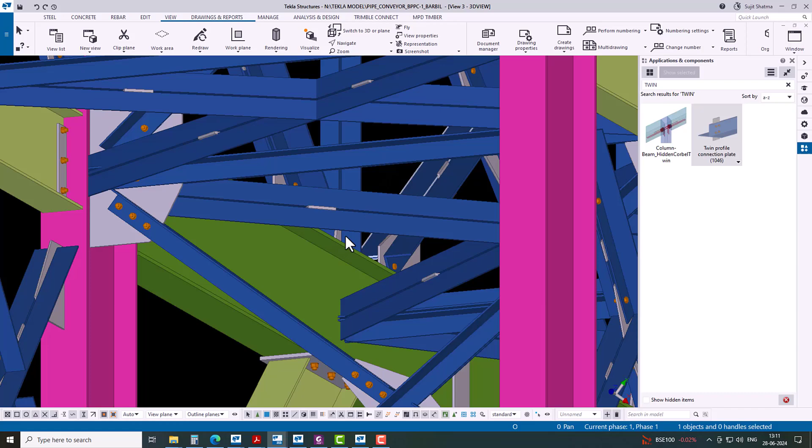Friends, today I come with another exciting video about how we can easily create a twin profile connection in Tekla structure. So let's move in.

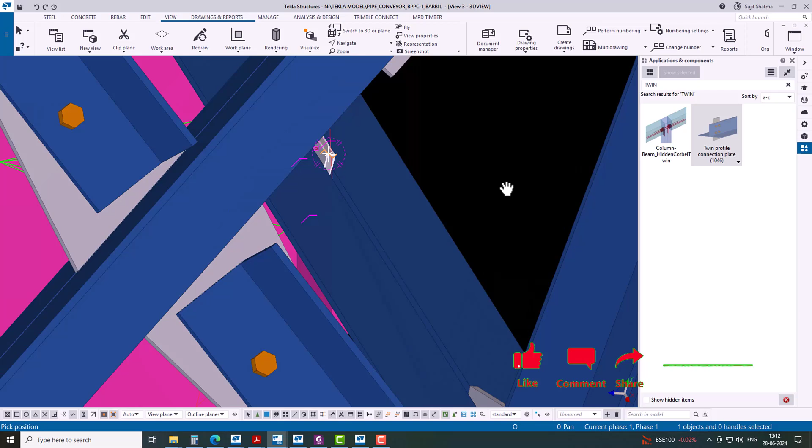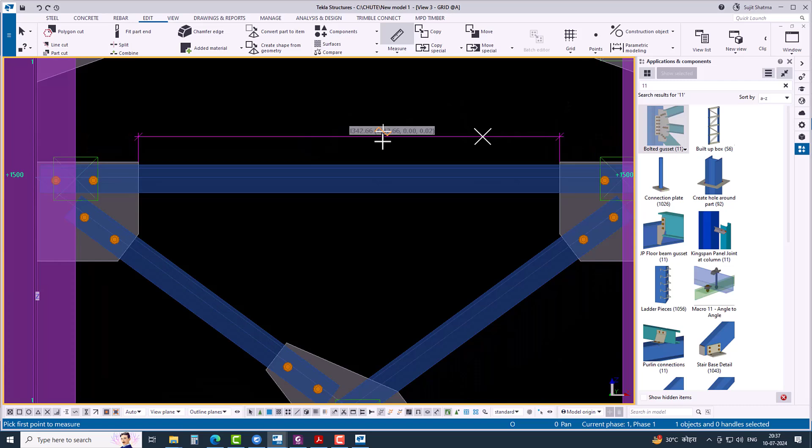As you can see, there is one small structure. For this tutorial we already made in this Tekla software, and now we are going to create a twin profile connection between this vertical bracing. Generally twin profile connections are used to connect two different angles with a certain plate, and this angle we can also use for two different members which have some close distance.

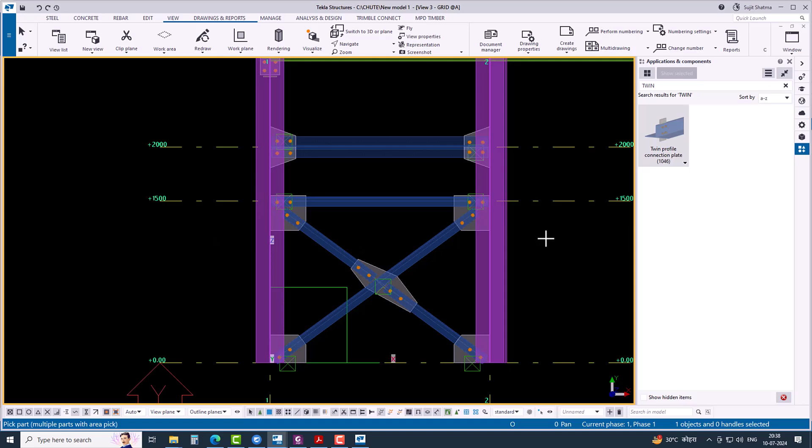In order to use this 1046 twin profile connection, we need some reference points. So first we need to create some reference points to place the twin profile plate. As you can see here, we already created a small vertical bracing connection for this tutorial, and the distance between these two connection plates is near about 1300 millimeter and 700 millimeter.

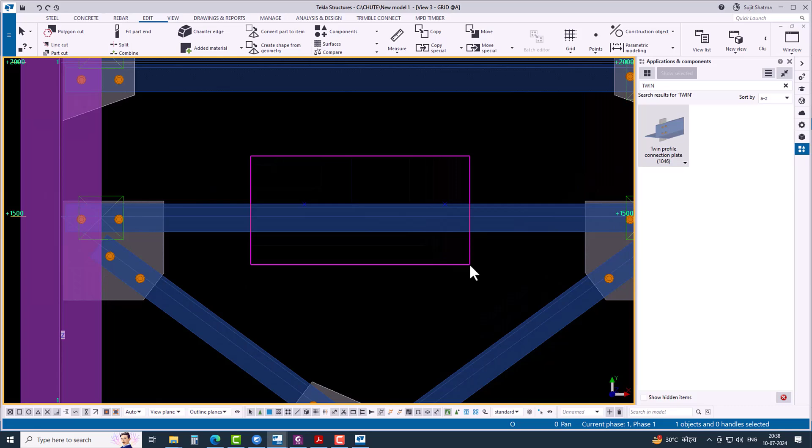So placement of the twin profile also depends upon the design drawing and the distance between the gusset connection. So first of all we need to create some reference points over this twin structure.

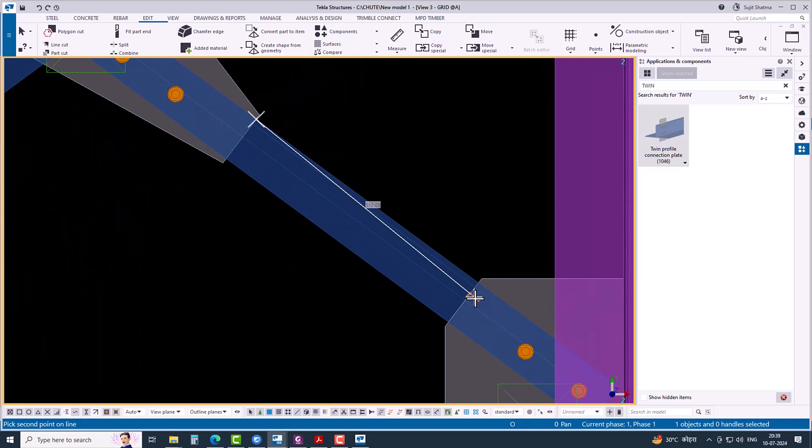For that you need to go to the edit section and take the point. Here we are using by default 1 or 2 points. You can see here, now again go to the point, divide the line points, and create one or two different points at a certain distance.

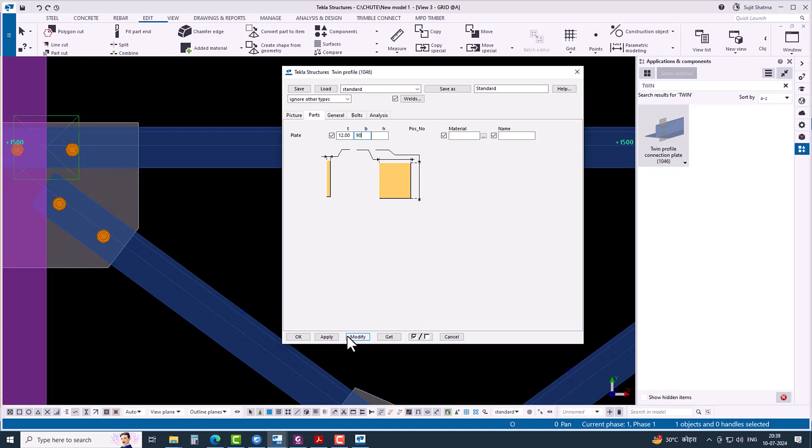So first we need to create a number of points in the twin angle. Then go to the connection and set the UCS as the current UCS. Here we are using by default 12 millimeter back to back distance between the member.

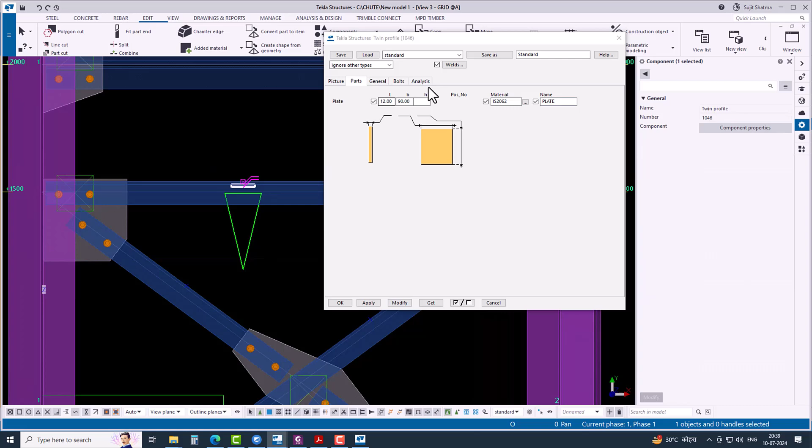So the thickness of this gusset plate should be equal to 12 millimeter, and we are using ISA 90. So the width of this plate, by default, we are using 90 millimeter, and the material and name of the plate you can define as required.

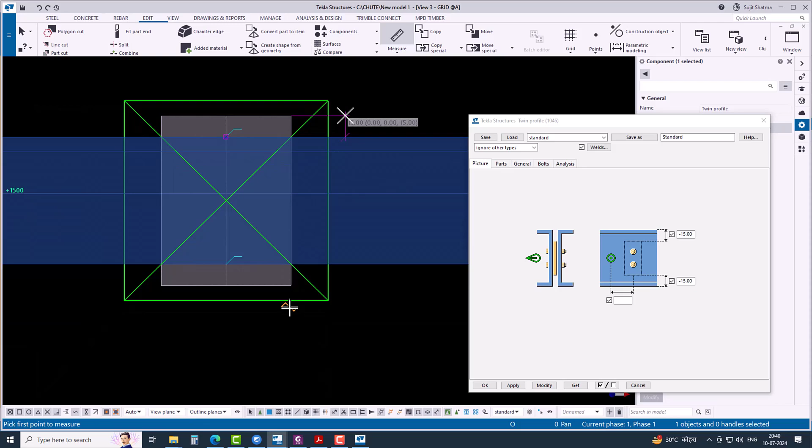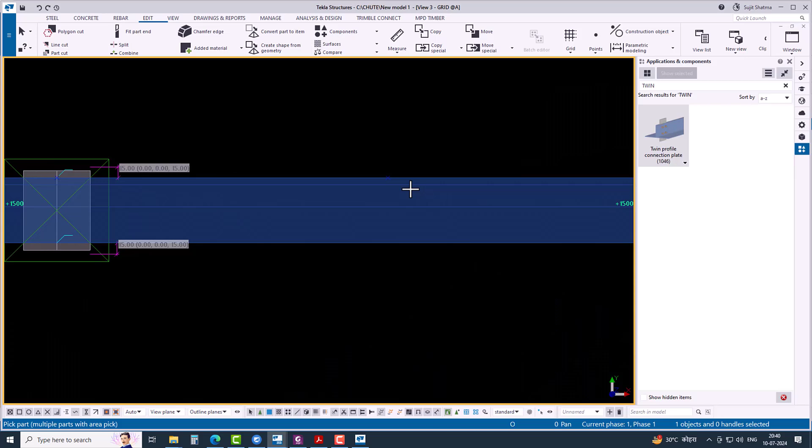You can see here the height of this plate is by default equal to the height of the member. Simply just put here minus 15 or minus 10 millimeter to extend this plate. Generally we give the extension only for the back to back angle.

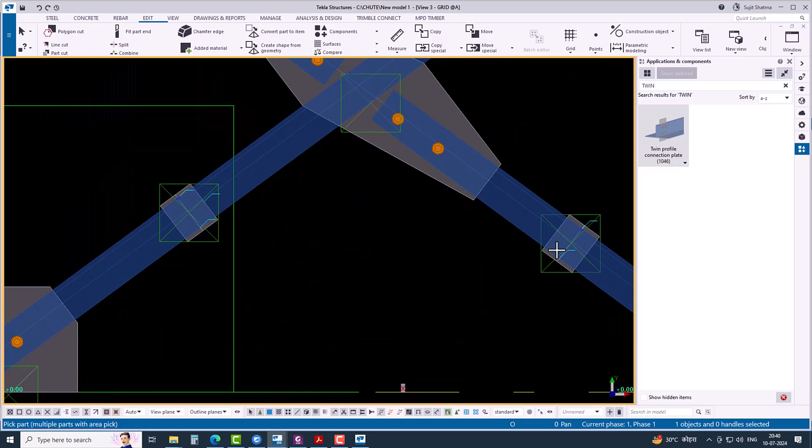Now again select this member and pick the member first, then pick the reference point, and similarly you can also put this connection here.

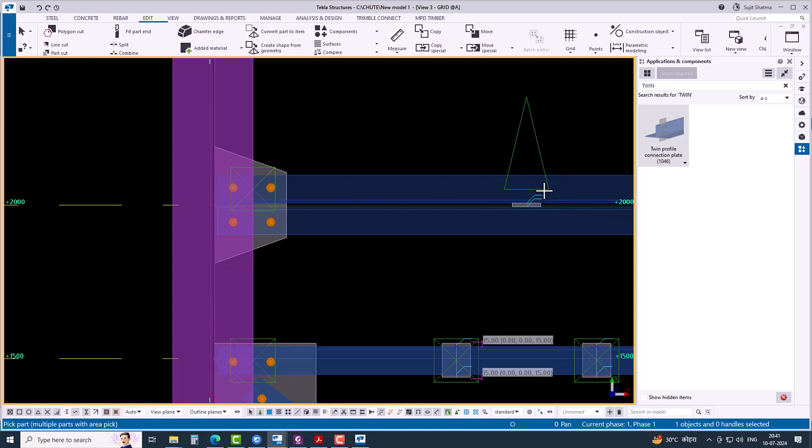Sometimes we need to define a different orientation UCS to create a connection in an inclined vertical brace, but here this twin profile is a little bit different from the previous one.

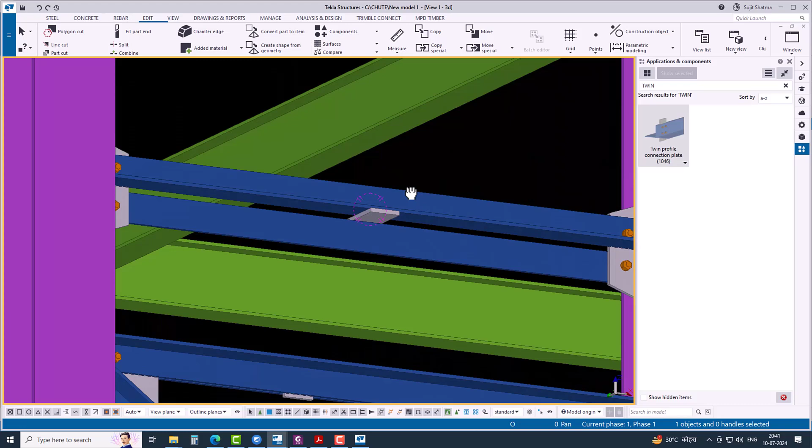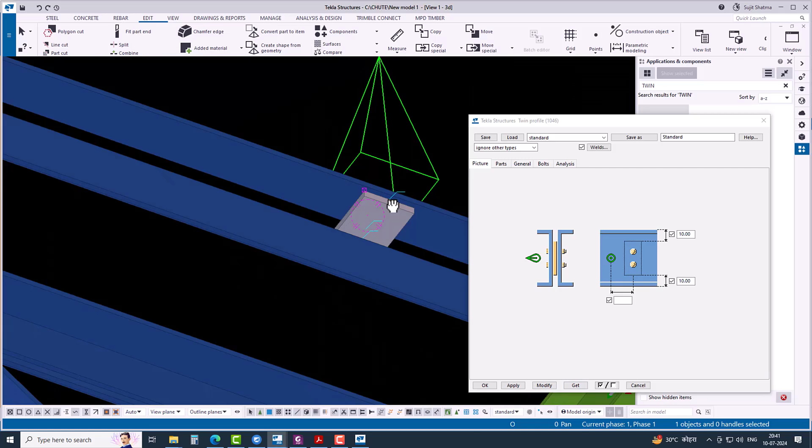Here we are using the star angle, so we need to edit this connection. As you can see here, this one is our star angle, so we are going to reduce the height of this plate. Generally we provide this dimension to create easy welding between this member. Here we put 10 millimeter in the positive direction, so the plate size is reduced.

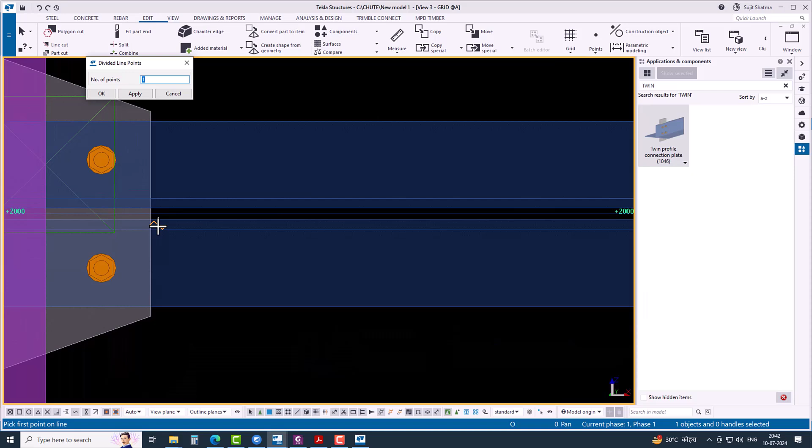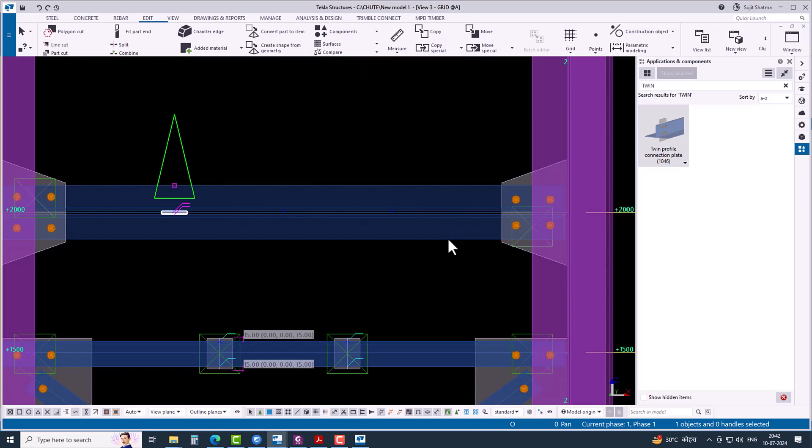Here we are going to create 3 different points and copy this connection, then move it to the first position. Then again copy the previous one and place it at the other 2 points. You can also move with the new connection.

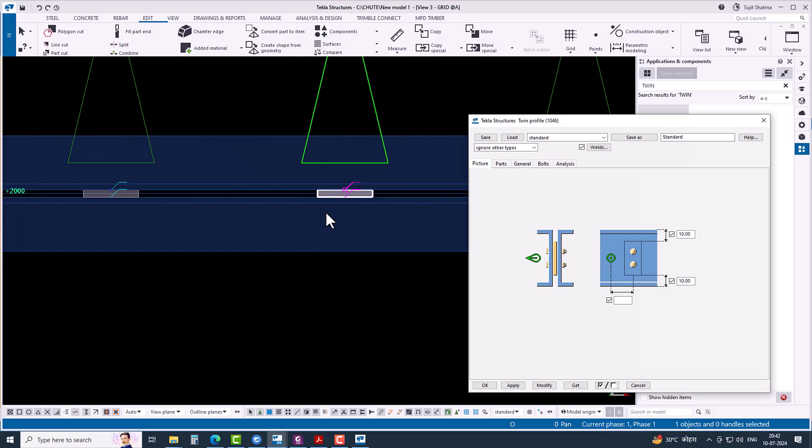For sharp profile, generally we are using the zigzag or up and down position for this twin plate. It provides better strength for this twin member.

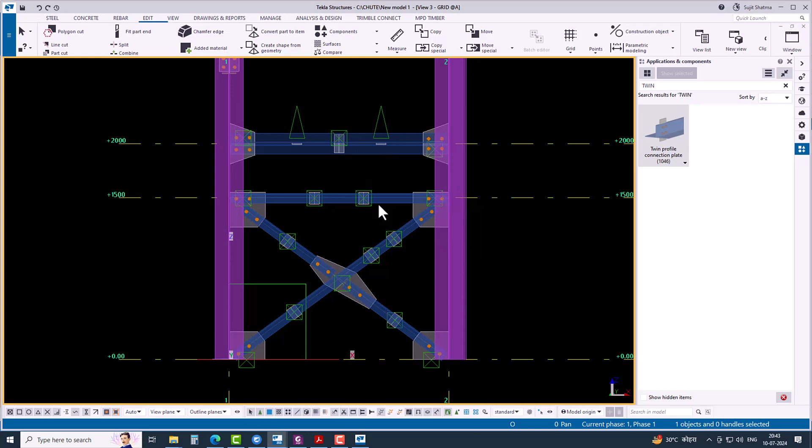If you go with putting the bolting in this twin profile, here you can also make it. By default we are using the bolt size at 12 mm bolt standard. You can define it here.

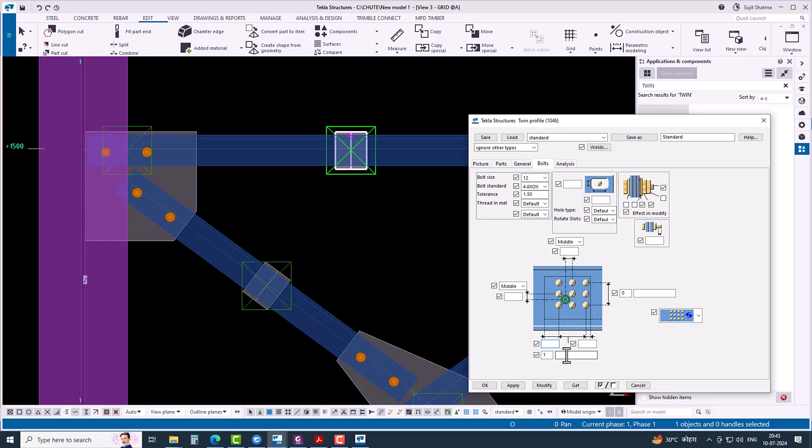We are taking the reference as middle in the vertical and horizontal dimension, and for the number of bolts we put one in the horizontal and one in the vertical direction, so the bolt will be displayed. Here you can see one bolt is created in the middle of this plate.

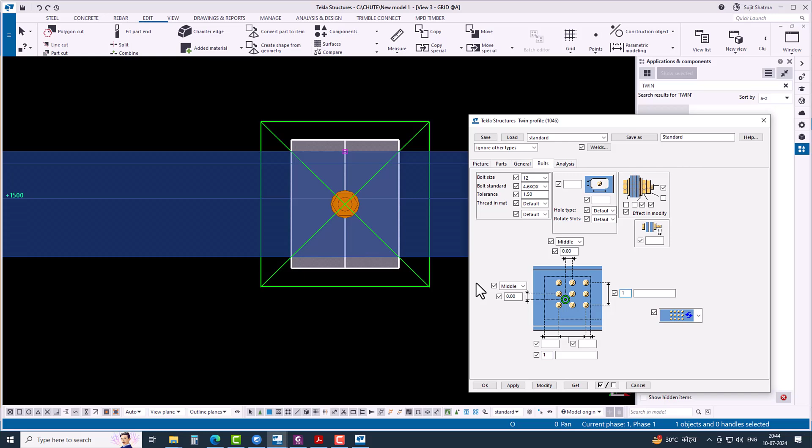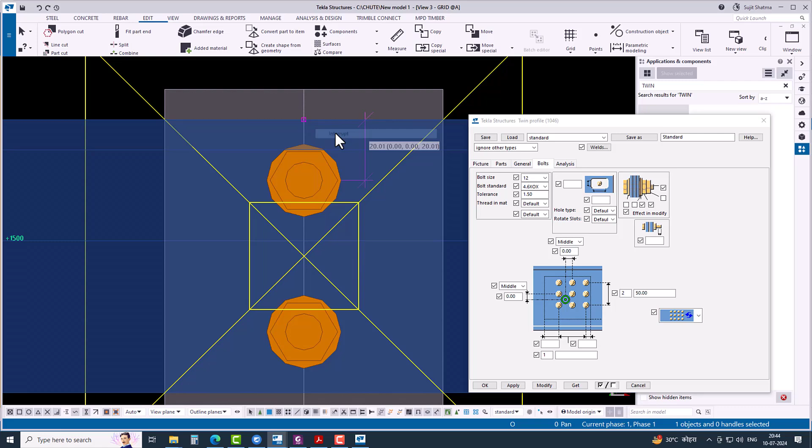If you put 2, then you can see here 2 different bolts of same size. This one is at 20 mm and the component shows yellow color. It means they are having some issue regarding this connection, maybe it's clashing with the root radius of this member. You can see here.

Just simply shift and right click and show with the exact line. Then you can see the clashing.

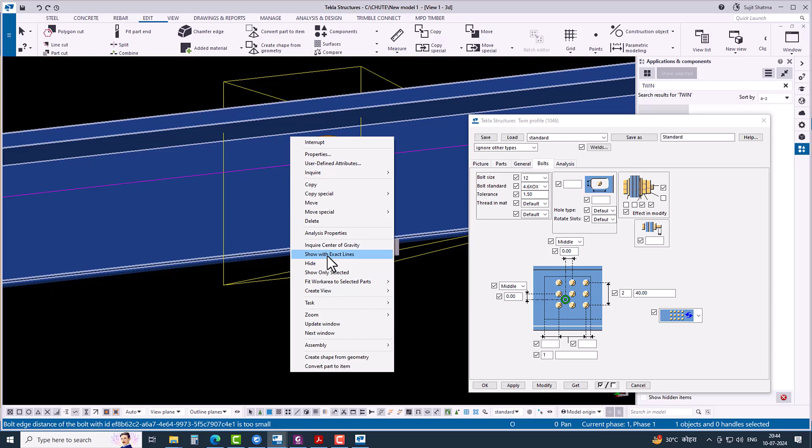So here we need to go through either one, or we need to move down the distance of this bolt from the top of the steel. If we put one bolt, then you can see here it's more clear.

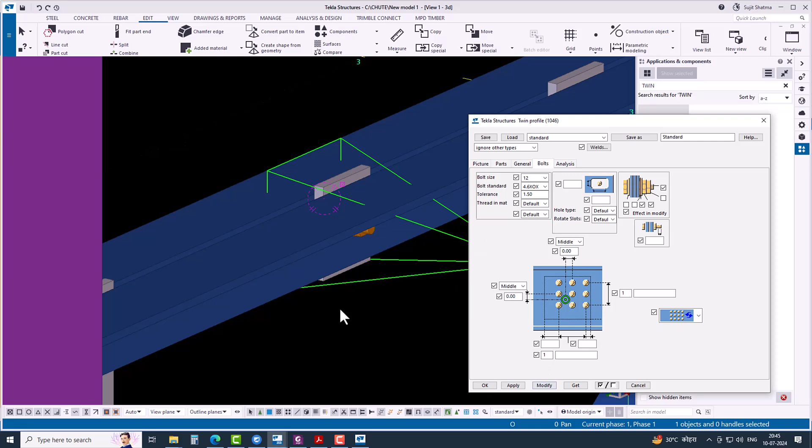So this is all about the twin profile connection 1046 in Tekla Structures.